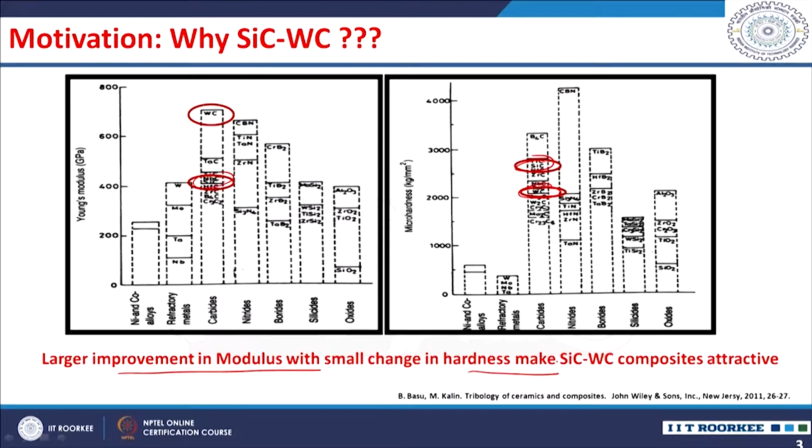Among the silicon carbide based ceramic composites, we can see the Young's modulus of tungsten carbide is much higher than silicon carbide, whereas the hardness is slightly lesser than the silicon carbide hardness. So, in a silicon carbide tungsten carbide composite, we can expect an improvement in the modulus with a small change in the hardness. Such a composite will be attractive for several tribological applications.

However, our literature study indicates that such a material has not been studied for its tribological behavior. Particularly, silicon carbide has higher hardness and oxidation resistance, whereas tungsten carbide has better strength and fracture toughness. So, the composite of silicon carbide tungsten carbide is expected to exhibit improved properties in wear conditions.

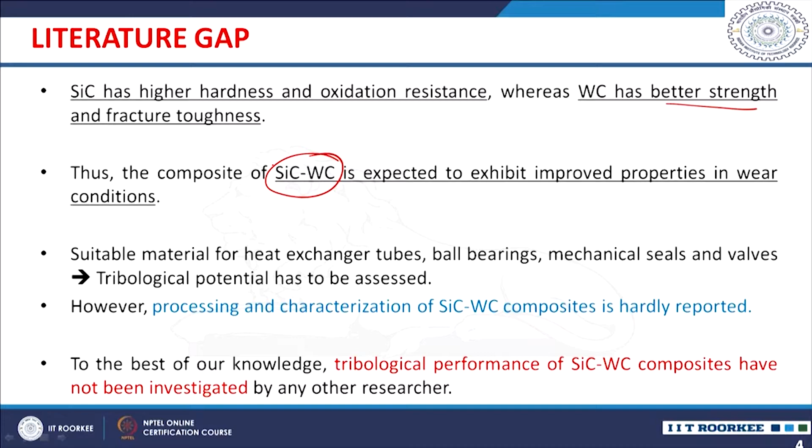However, the processing and characterization of dense composites of silicon carbide tungsten carbide is a difficult task. So, very few studies are reported for silicon carbide tungsten carbide composites. Particularly, preparation of dense silicon carbide tungsten carbide composites is not yet reported. In addition, the tribological performance of dense silicon carbide tungsten carbide composites has not been investigated by any other researchers.

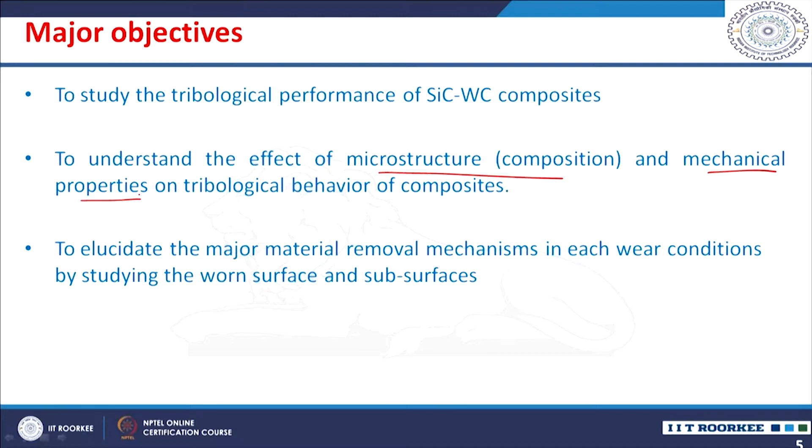So, in this context, the major objectives of the present study, which will be discussed in today's class, are to study the tribological performance of the silicon carbide tungsten carbide composites, and to understand the effect of microstructure, by changing the composition, as well as mechanical properties on the tribological behavior of these composites, particularly to elucidate the major wear mechanisms in each wear condition by studying the worn surfaces and subsurfaces.

These silicon carbide tungsten carbide composites were prepared at the University of Seoul with the support of Professor Youngwook Kim of University of Seoul. Four composites are selected for the present study with varying tungsten carbide content from 0 to 50%. So, 0, 10, 30, 50 weight% tungsten carbide containing silicon carbide ceramic composites are prepared with beta silicon carbide with a small amount of alpha silicon carbide and aluminum oxide, yttrium oxide, calcium oxide as additive systems.

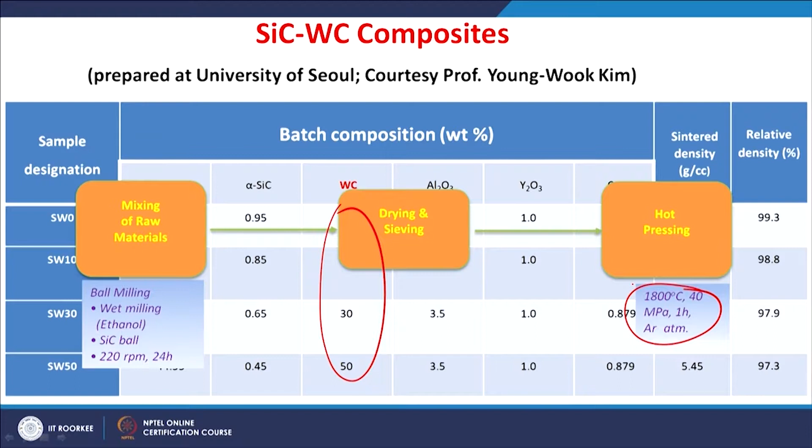These were prepared by hot pressing. Before hot pressing, the batch powders were mixed, then dried and sieved, followed by hot pressing at 1800 Celsius and 40 MPa for 1 hour in argon atmosphere. The sintered density of these materials is 98 to 99%.

The microstructure of these sintered silicon carbide composites exhibits almost equiaxed grains of silicon carbide, with very little presence of any elongated grains. The almost equiaxed SiC grain size decreases from around 830 to 550 nanometers with increase in the tungsten carbide content from 0 to 50%.

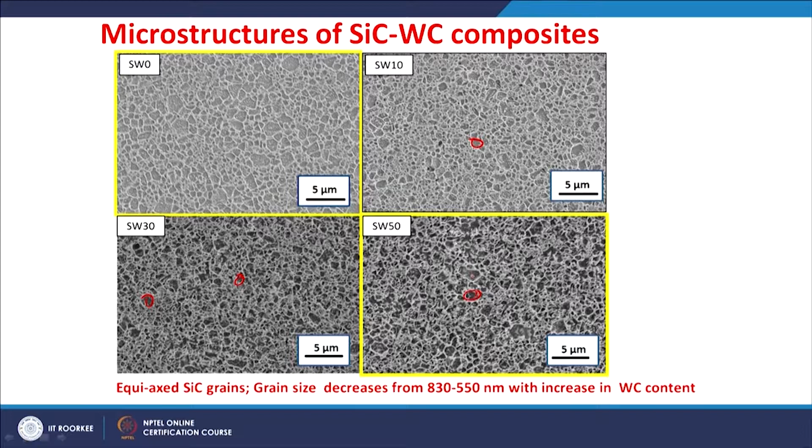Now, with respect to the tungsten carbide content, we can see uniformly distributed tungsten carbide particles in the silicon carbide matrix, whereas you can also see certain agglomeration when you have a larger amount of tungsten carbide. This SiC with 50% tungsten carbide composite shows agglomerations of tungsten carbide particles. The mechanical properties were studied for these composites. The hardness increases up to 30% tungsten carbide, whereas it slightly decreased with the 50% one, whereas fracture toughness improves from 5.85 MPa root meter to around 6.66 MPa root meter.

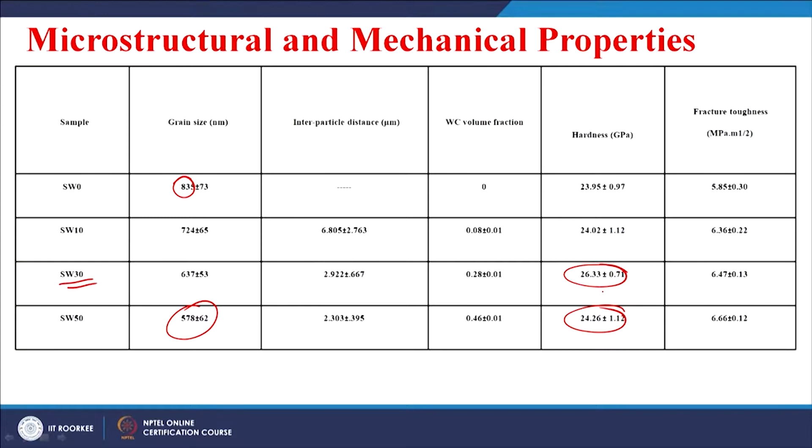If you look at the correlation between the microstructural characteristics and the mechanical properties, the grain size decreased from 835 nanometers to 578 nanometers with increase in tungsten carbide content. The interparticle distance also decreased with a larger amount of tungsten carbide in these composites. So, it indicates that while sintering, the grain growth was restricted by the presence of a larger amount of tungsten carbide content. It actually reflected in the properties, particularly hardness showed an increase for the silicon carbide 30% tungsten carbide composite, and the fracture toughness continuously increased from 5.85 to 6.66 MPa root meter. This fracture toughness improvement is very important for any structural applications. So, it is to be studied.

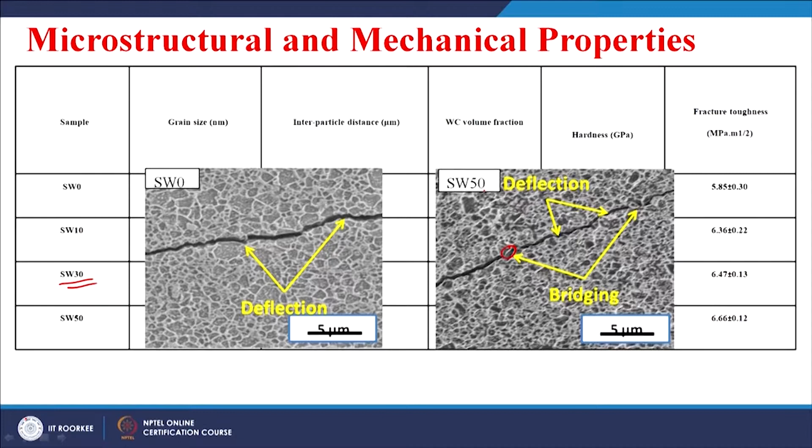So, after Vickers indentation, at the edges of these indents the cracks are propagated, and we can see here when no tungsten carbide was added, the deflections for the cracks are minimal, whereas the deflection or the bridging are actually improved when you have the tungsten carbide particles. So, these tungsten carbide particles improve the fracture toughness by the bridging of the crack or the deflection of these cracks. So, with this introduction of this material,

the tribological performance is systematically studied in two different sliding wear conditions. For this, one unidirectional sliding wear study was done and another reciprocatory sliding study was done. So, in the unidirectional sliding wear study, the counter body influence and the tungsten carbide content were particularly studied, whereas in the reciprocatory sliding conditions the temperature of the sliding test and the tungsten carbide content were particularly studied. In addition to the sliding wear behavior in unidirectional, a major focus is given to the subsurface analysis to find out the origin of the material removal mechanisms.

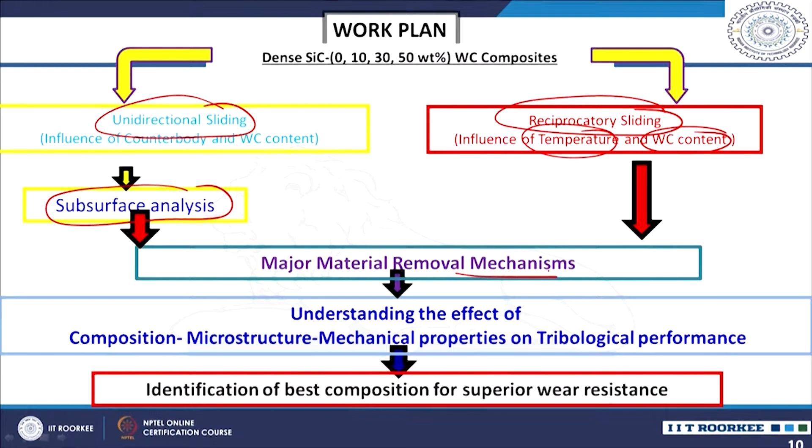Basically, the major aim of this particular study is to elucidate the major material removal mechanisms, so that we can have an understanding of the very important relation of the composition of this composite, that is tungsten carbide content variation, that reflects into microstructure, and the microstructural influence on the mechanical properties and the tribological performance. So, the particular study is to understand the effect of the composition or microstructure on the mechanical and tribological behavior, and to identify the best composition for the superior wear resistance. So, let us go through the salient results obtained in unidirectional sliding wear studies.

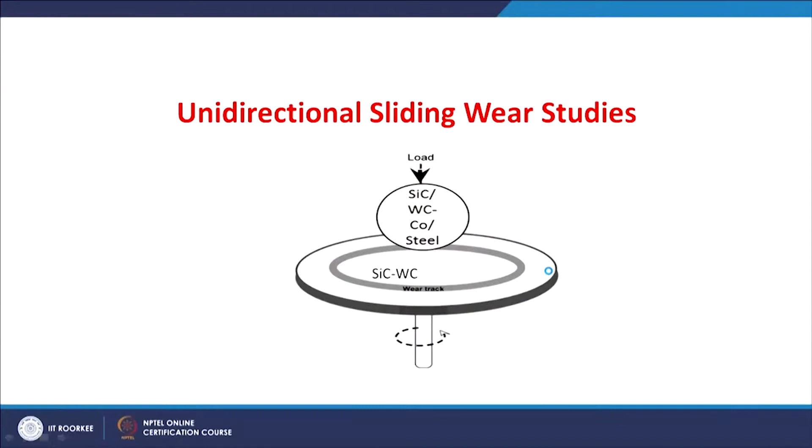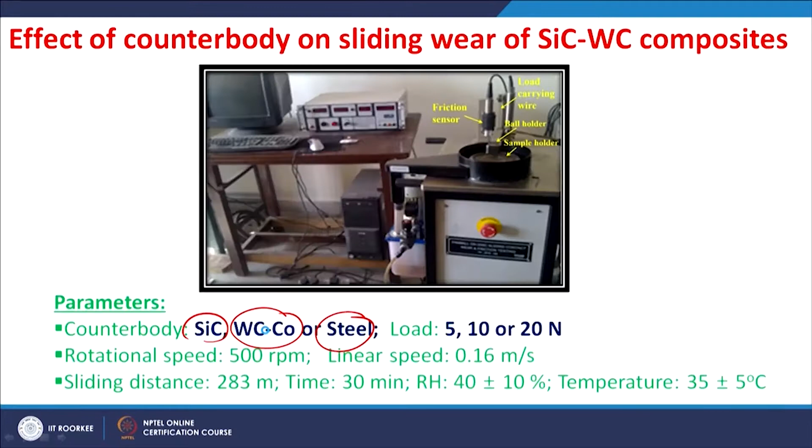So, mainly three different counter bodies were used: silicon carbide ceramic, tungsten carbide cobalt, which is called a cermet, and a steel. Three loads, separately 5, 10, and 20 Newton, were applied, with a combination of other parameters which were kept constant. For this, the ball on disc tribometer was used. So, the disc is the specimen, which is the silicon carbide tungsten carbide composite, whereas the ball is changed from silicon carbide to tungsten carbide cobalt or to steel, and the friction was measured and the wear was determined.

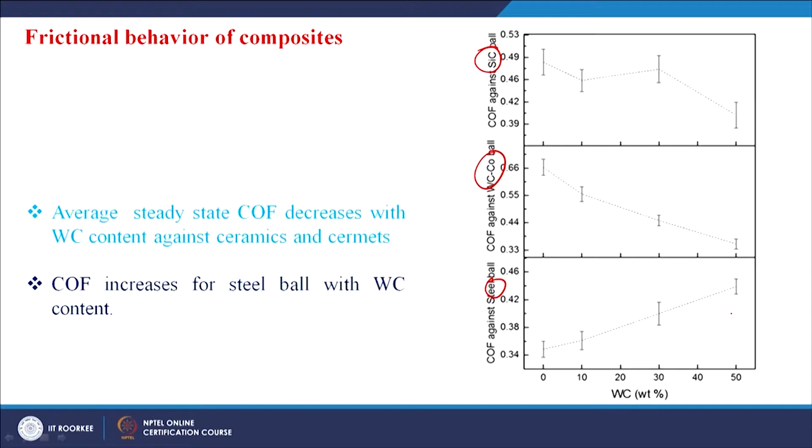So, the friction coefficient shows that the average coefficient of friction actually decreases against silicon carbide or tungsten carbide cobalt ball, whereas against steel it actually increases because the surface is actually changed at the contact. So, there is a friction behavioral change. Let us understand it further. When the wear volume was measured, as I explained in the previous class, the profilometry was used to read the surface profiles in a 2-dimensional way, and over a particular slide distance this was integrated and the wear volume was determined.

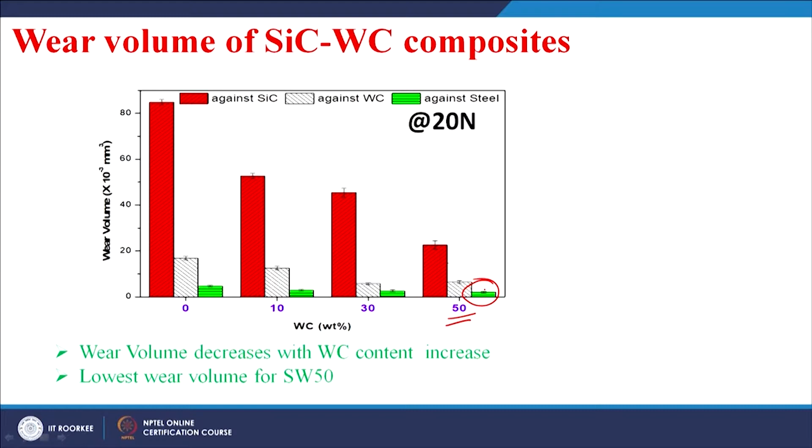So, you can see the wear volume of these composites having 0, 10, 30, 50% tungsten carbide content, against silicon carbide, against tungsten carbide cobalt, and then against steel. So, the wear volume decreased with tungsten carbide content for any composite against any counter body, whereas the lowest wear was observed with the silicon carbide containing 50% tungsten carbide. So, at a particular load the wear volume decreased with tungsten carbide increase, and the lowest wear was obtained with the SW50 composite. Regarding the effect of the counter body, the wear volume was highest for the composites worn against the silicon carbide ball, whereas the wear volume was the lowest for the composites worn against the steel ball. So, tungsten carbide cobalt data is in between.

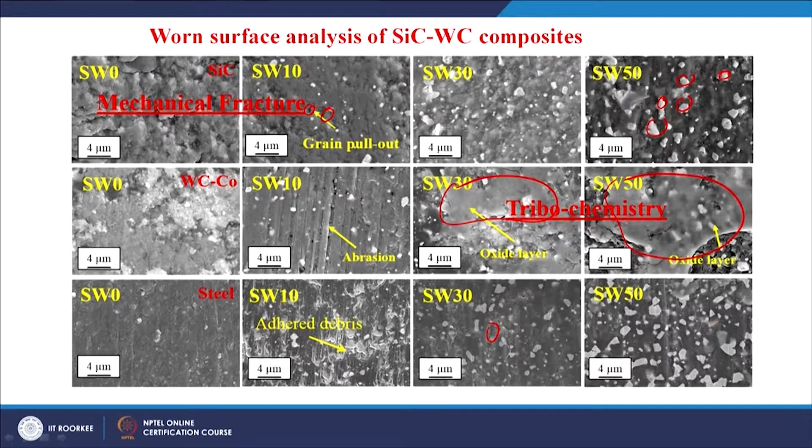But as the tungsten carbide content is increased, you can see the presence of a particular layer. This layer predominantly covers the surface, particularly when you have the highest tungsten carbide content. But when you see the composite worn surfaces which were worn against steel, again they show the debris and then fracture and the removal of these tungsten carbide particles. So, there is a change from the mechanical fracture to tribochemistry when there is a change in the tungsten carbide content or there is a change in the counter body.

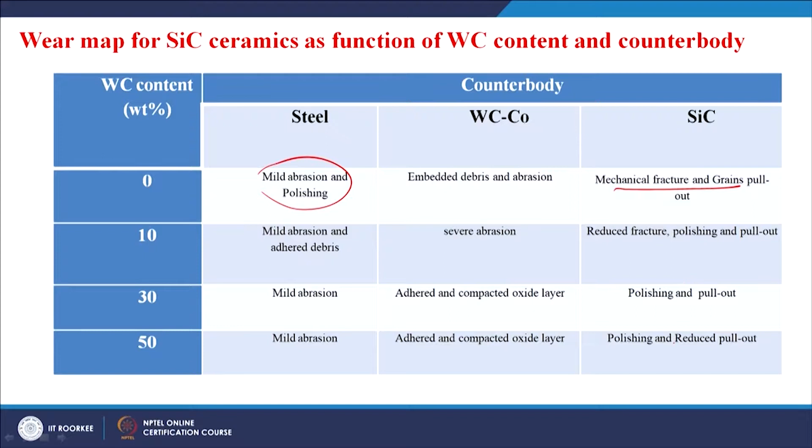Against silicon carbide, again there is only grain pull out and fracture, only change in the fracture is observed with increase in the tungsten carbide. So, with an increase in the tungsten carbide content, the fracture is reduced and it becomes more polished and reduced pull out. To understand the actual mechanisms, we need to also study the counter body

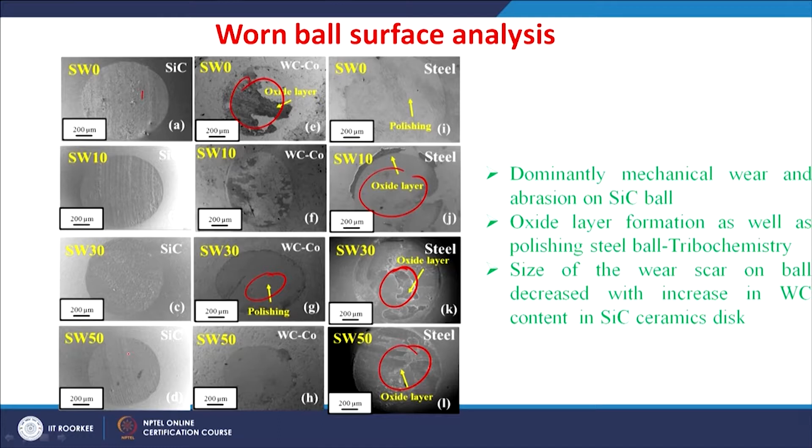worn surfaces. So, you can see the counter body which is a steel. So, the impression is a circular impression after the wear. The size of the wear scar on the ball decreases with the increase in the tungsten carbide content in the silicon carbide ceramic disc. So, dominantly there is a mechanical wear and abrasion on the silicon carbide ball, whereas oxide layer formation as well as the polishing is observed against tungsten carbide or on the balls of tungsten carbide or the steel. So, the ball surface analysis shows the presence of tribochemistry on the tungsten carbide cobalt balls or the steel balls, whereas the silicon carbide balls, they do not show any tribochemistry. It is simply the fracture, or you can see the abrasion and then removal of this material by fracture.

So, in order to understand the chemistry difference on the surface against different counter bodies, the Raman analysis was done, and the Raman analysis shows different products formed as a debris. So, the debris against the silicon carbide, you can see the oxides of silicon and tungsten oxide. So, generally when the harder counter body is sliding over the disc surface because of the harder indenting points, the material is removed and then the material is subjected to oxidation in normal ambient conditions of sliding. So, you can see certain oxides also forming against tungsten carbide cobalt.

Also you can see the tungsten oxide, silicon oxide and the cobalt tungsten oxide debris. And against steel, in addition to these oxides, we also see certain oxides of iron and iron tungsten oxide. So, it actually indicates there is a chemistry difference in the debris formed when these composites were subjected to sliding against different counter bodies. The friction is more when these were worn against steel because of the presence of the harder oxides of iron or iron tungsten oxide, and these iron tungsten oxides are not present in the other conditions. So, you do not have such an increase in the friction.

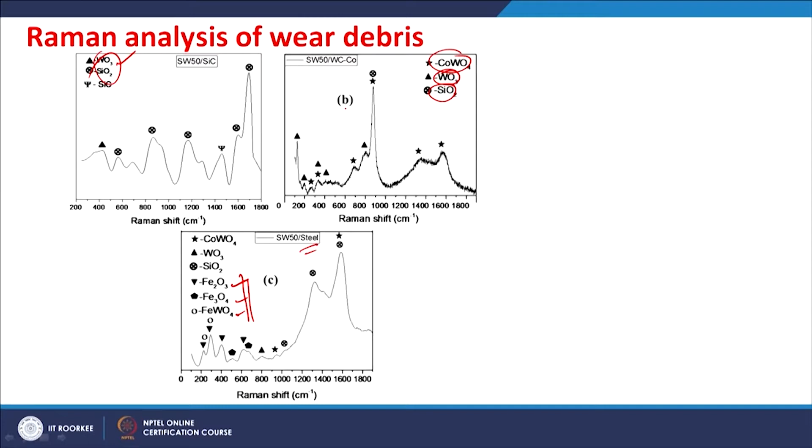So, summarizing the silicon carbide ceramics when you do not have any tungsten carbide, they just fracture by intergranular fracture, intergranular mode. So, this is actually the same against silicon carbide or tungsten carbide cobalt or steel ball. So, the larger grains came out as a debris, and when the silicon carbide contains some tungsten carbide particles, the composite shows a decrease in the size of the grain. So, the debris also will be smaller in size. So, the fracture we observed also changed predominantly from intergranular to transgranular when you have the tungsten carbide particles in a silicon carbide ceramic.

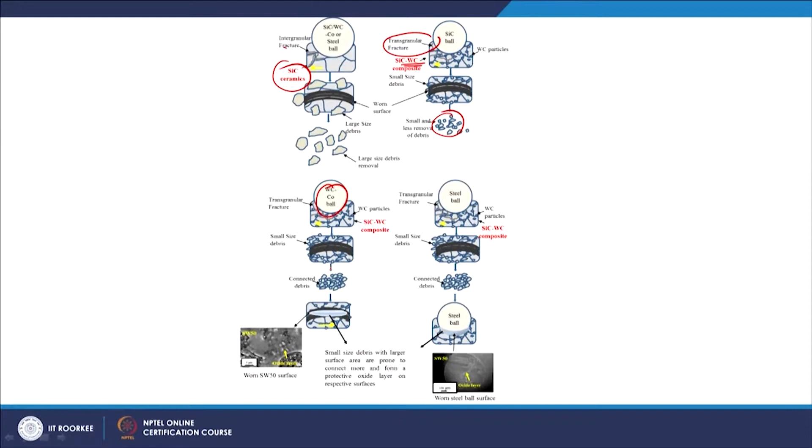Now, if you see the effect of the counter body against tungsten carbide cobalt ball, these composites again fractured by the transgranular mode, but because of the finer size of the debris and also with the increase in tungsten carbide content in the composite, particularly this SW50 or SW30, you can see these smaller debris with a larger surface area are more prone to connect and then form a protective oxide layer like this. So, you get a decrease in the wear. In case of the steel ball, these composites again fractured by the transgranular mode, and the smaller sized debris connect to each other and form a layer, and the layer is actually observed on the ball surface.

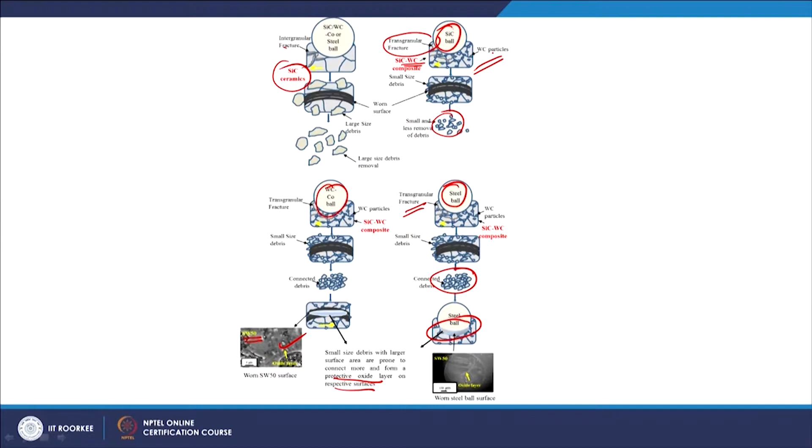So, the layer is observed either on the ball surface of the steel or on the disc which was worn against the tungsten carbide cobalt. They show certain layers, whereas such a layer is not observed when these composites were worn against silicon carbide. Against silicon carbide, it is purely the fracture. The material is removed only by the mechanical fracture and then the resultant grain pull out.

So, the major results from the unidirectional sliding wear study are like this. The coefficient of friction depends on the counterpart materials irrespective of their ball hardness. With increase in tungsten carbide content in silicon carbide ceramics, the coefficient of friction against steel ball increases, whereas it decreased for other silicon carbide or tungsten carbide cobalt ball. Wear volume decreased with increase in tungsten carbide content, and the silicon carbide 50% tungsten carbide composite exhibited minimum wear

against any counterbody. Regarding the major mechanism of material removal, against silicon carbide ball, the silicon carbide tungsten carbide composites are worn by purely mechanical fracture with micro cracking, whereas tribochemical wear is dominating for the composites worn against tungsten carbide cobalt or the steel ball. So, there is a difference in the mechanism of material removal. So, there is a difference in the friction and the wear. So, this actually indicated very important information that when the silicon carbide tungsten carbide composites were subjected to different counterbodies, we have a different wear mechanism dominating. So, that results into the performance difference.

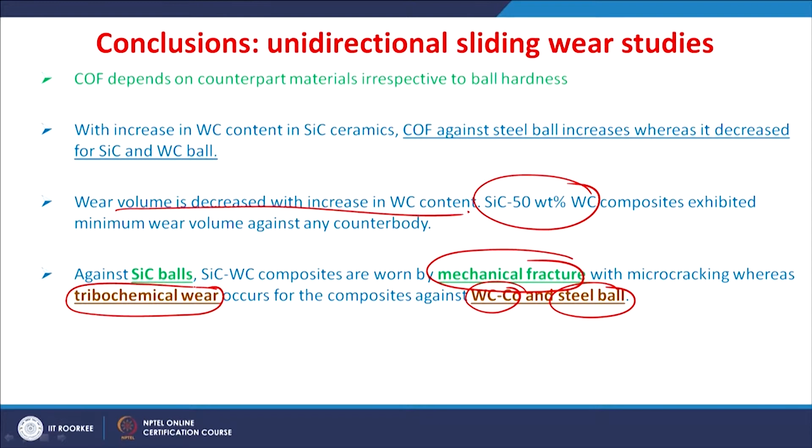Amongst the three counterbodies, when we use the silicon carbide counterbody, purely mechanical fracture is dominating. So, it is very important to understand the origin of such a mechanical fracture. So, we selected these silicon carbide tungsten carbide composites worn against silicon carbide ball only, where there is a purely, dominantly mechanical fracture, for further studies of the subsurface analysis. The subsurface analysis study is very important to identify the origin of such a fracture. So, we purposefully have not taken these silicon carbide tungsten carbide composites sliding wear studies against the tungsten carbide and steel ball, where there was a tribochemistry.

So, these subsurface analysis studies were possible with the support from Professor Amartya Mukhopadhyay of IIT Bombay. So, we can see here the subsurface analysis was done by using a combination of a focused ion beam with TEM analysis. Sample was cut at an angle of 35 degree using a focused ion beam to observe the subsurface.

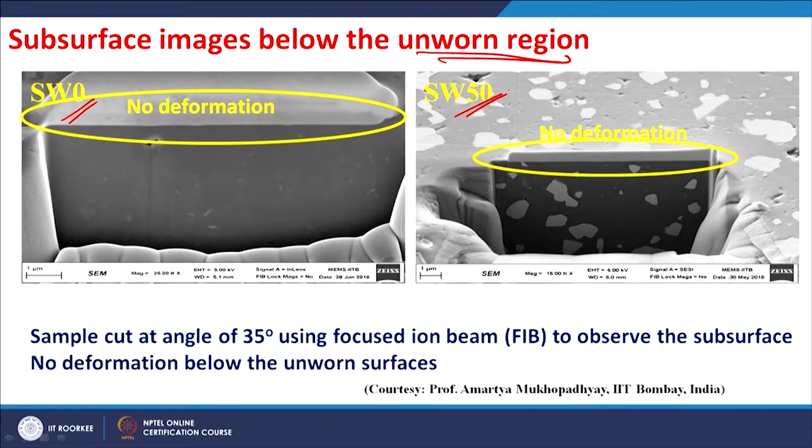So, the unworn regions of the sample do not show any deformation, whether it is a silicon carbide without having any tungsten carbide or with having any tungsten carbide. There is no signature for any deformation, whereas when these composites were worn, you can see a lot of difference in the subsurface regions. So, when it is only silicon carbide, you can see this damaged zone is around 1 micrometer. In case of composite, there is only 300 nanometers. So, there is a resistance against the damage at the subsurface when you go for the composite.

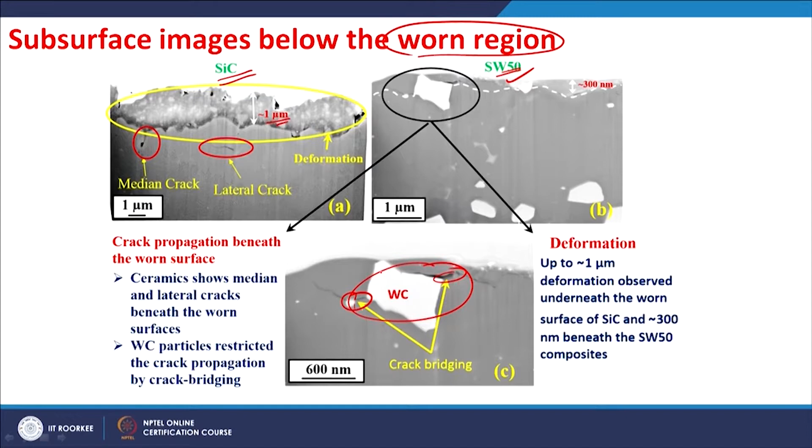In addition to that, we can also see several cracking signatures here. So, generally these ceramics show median and lateral cracks beneath the worn surfaces. It actually follows again the classical linear fracture mechanics, when the hard and sharper contact slides over a surface, particularly the brittle surface, the median or lateral cracks are generally found. But if you can see this difference between the subsurface images of these silicon carbide ceramic and silicon carbide tungsten carbide composite, the tungsten carbide particles restricted the crack propagation by the crack bridging, right. So, this essentially shows there is a benefit when you go for a composite from restricting the crack propagation.

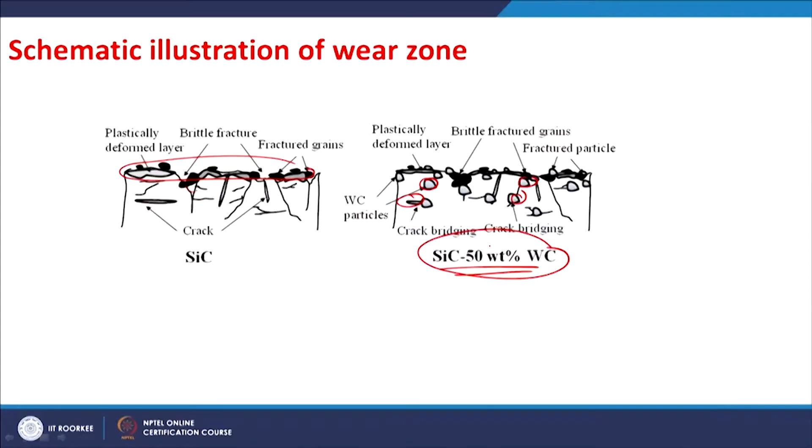So, this can be illustrated schematically. The upper region generally has a plastically deformed region, and just below that you have a fracture region. So, the fracture region is characterized by this cracking, whether it is median or the lateral cracking. When you have tungsten carbide particles, these particles result in crack bridging or the crack deflection that improves the resistance against the fracture. So, you get a lesser wear also. So, if you can recall, these silicon carbide tungsten carbide composites showed better wear resistance than the silicon carbide ceramic because of this resistance against the crack propagation.

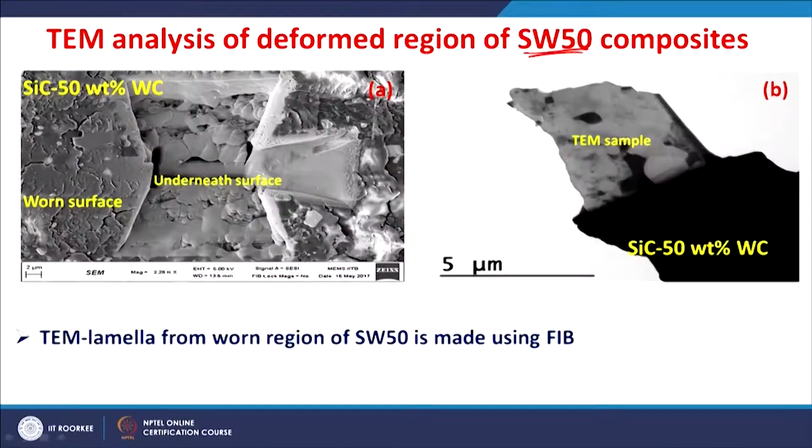To understand the origin of such behavior, the TEM analysis was done on the deformed region of the selected composite. A TEM lamella was made from the worn region using the FIB. So, this TEM sample was subjected to further investigation. So, this shows the silicon carbide grains and then tungsten carbide particles.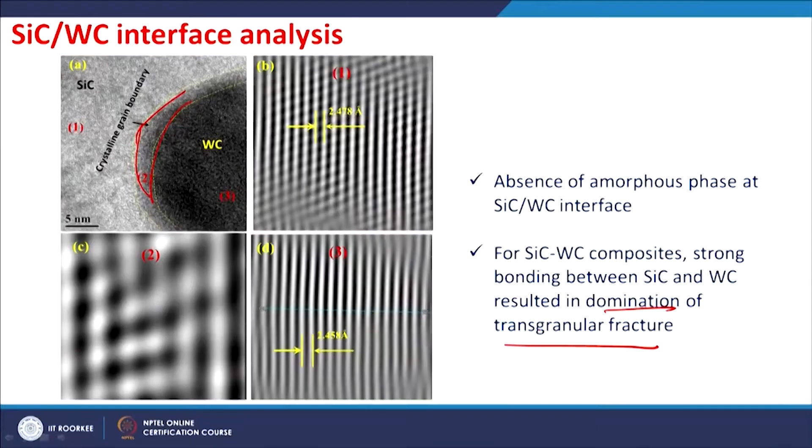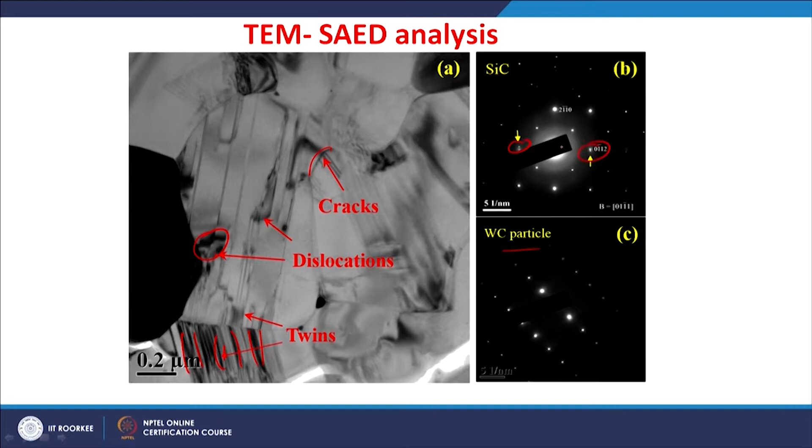Further, the selected area diffraction analysis also indicates the crystalline arrangement of the silicon carbide or these tungsten carbide particles. In addition to that, the regions underneath the worn surfaces show the signatures of cracks as well as dislocations. In addition to these dislocations and cracks, we can also see a lot of twins. The SAED pattern also indicates the presence of the twins. So, the deformation is possible just below the worn region in terms of the dislocations as well as the twins.

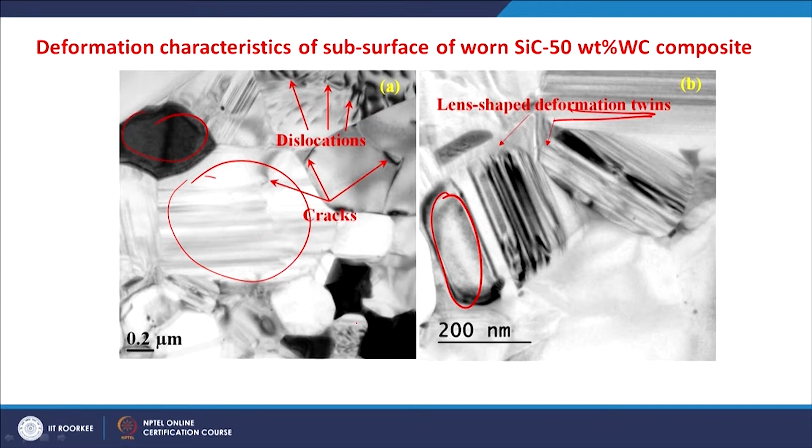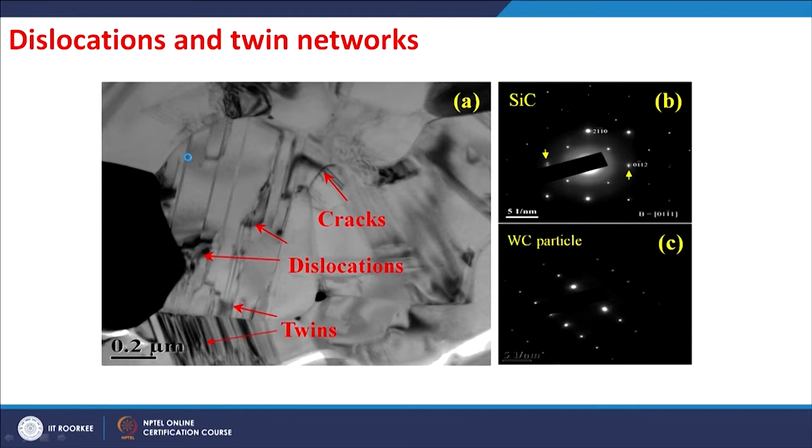As we know, silicon carbide ceramics have very few slip systems. It is quite possible the deformation happens by the formation of these twins. The shape of these twins indicates the lens, which indicate the deformation induced twins. So, you can see on the grains of the silicon carbide, the cracks and the dislocations are present, whereas the dislocations are not present in the tungsten carbide or at the interface of the tungsten carbide and silicon carbide.

So, concluding the subsurface study results, the deformation zones underneath the worn surface are larger for monolithic silicon carbide as compared to the silicon carbide tungsten carbide composite. It is more or less 3 times larger for the silicon carbide ceramics as compared to the silicon carbide 50% tungsten carbide composite. Micro cracks are observed below the worn region till 2 micrometer depth for monolithic silicon carbide ceramics. By contrast, the tungsten carbide grains are observed to bridge the cracks in case of the silicon carbide tungsten carbide composite.

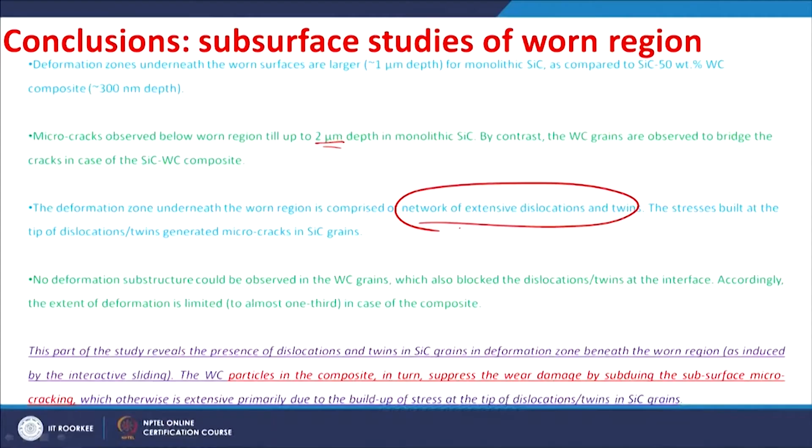The deformation zone underneath the worn region comprises a network of extensive dislocations and twins. So, the stresses built up at the tips of these dislocations or twins generate the micro cracks. So, you see a lot of micro cracks in silicon carbide grains, whereas no deformation substructure is observed in the tungsten carbide grains, which also blocked the dislocations or twins at the interface. Therefore, the extent of deformation is limited to almost 1/3 of what we observed here in case of the composite.

So, this particular study is very important in the sense that for preparation of such a sample for TEM analysis, the sample must be taken from the region underneath the worn surface. So, for that FIB was used and then TEM analysis was done carefully, which revealed this information about the deformation zones, the cracking as well as the beneficial effect of the tungsten carbide particles in the silicon carbide ceramics.

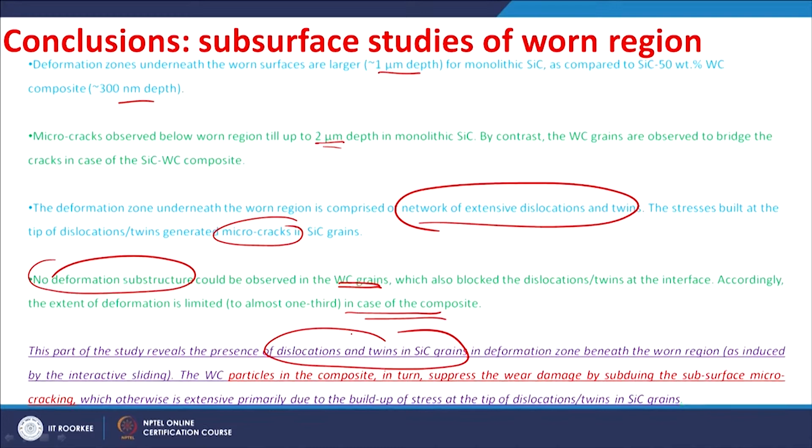So, this particular study reveals the presence of dislocations or twins in the silicon carbide grains in the deformation zone beneath the worn region. The tungsten carbide particles in the composite in turn suppress the wear damage by subduing the subsurface micro cracking, which otherwise is found to be very extensive, mainly because of the build up of stresses at the tips of these dislocations or twins in the silicon carbide grains. So, these stresses were developed because of the interactive sliding. So, the sliding induced stresses are responsible for the cracking. The cracking can be minimized when you use the tungsten carbide particles. That means a composite approach is very much beneficial in suppressing the wear damage by subduing the subsurface micro cracking.

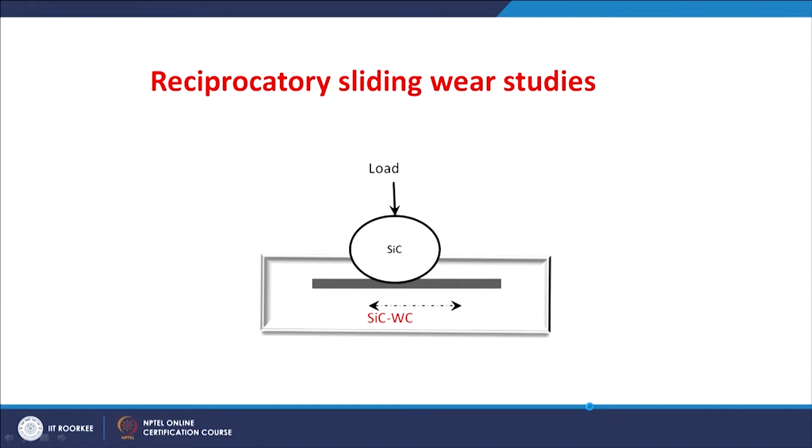Let us go to the last part of this lecture, the reciprocatory sliding wear studies. In order to understand the effect of the sliding mode from unidirectional to reciprocatory, we used a reciprocatory sliding wear test apparatus, where the ball was silicon carbide only and the load we changed from 6 to 19 Newton. These loads were selected to maintain similar levels of Hertzian stresses which were used in the unidirectional sliding test.

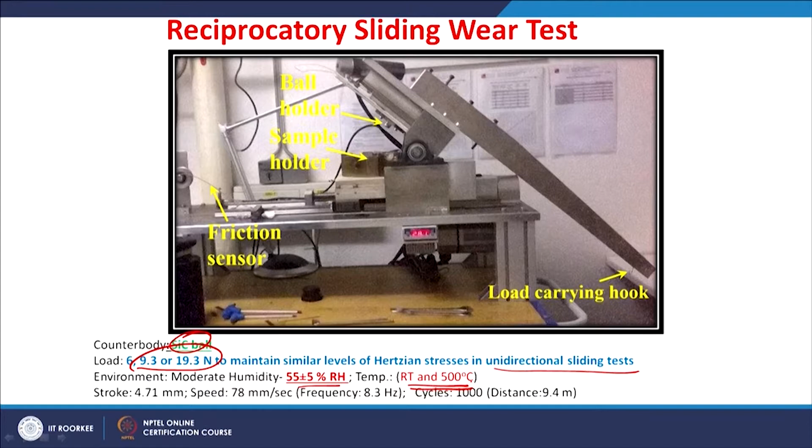So, these were done in moderately humid conditions at two different temperatures, room temperature and 500 Celsius. So, the major aim of this study is to understand the effect of the tungsten carbide content as well as the temperature of testing on the reciprocatory sliding wear behavior of the silicon carbide tungsten carbide composites.

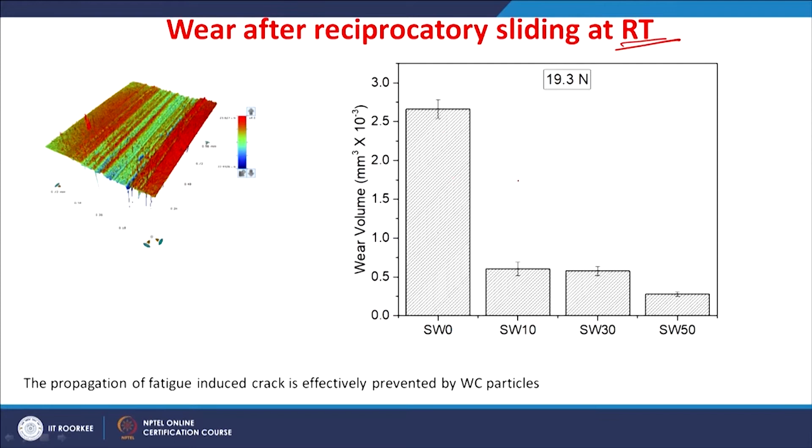Now, you see the wear volume of the composites worn at room temperature. As the tungsten carbide is introduced in the silicon carbide ceramics, the wear was substantially decreased. That means the reciprocatory sliding, which induces the fatigue-induced cracks, is effectively prevented by the tungsten carbide particles. This study was selected to understand the behavior of these composites in reciprocatory sliding.

In reciprocatory sliding, we have a difference in the contact time of this debris. So, it will actually affect the properties or the performance. If you can see the silicon carbide tungsten carbide composites after sliding in a reciprocatory mode at room temperature, the surfaces were showing micro cracks and pull out of the tungsten carbide particles, but with an increase in the tungsten carbide content, the fracture was minimally reduced.

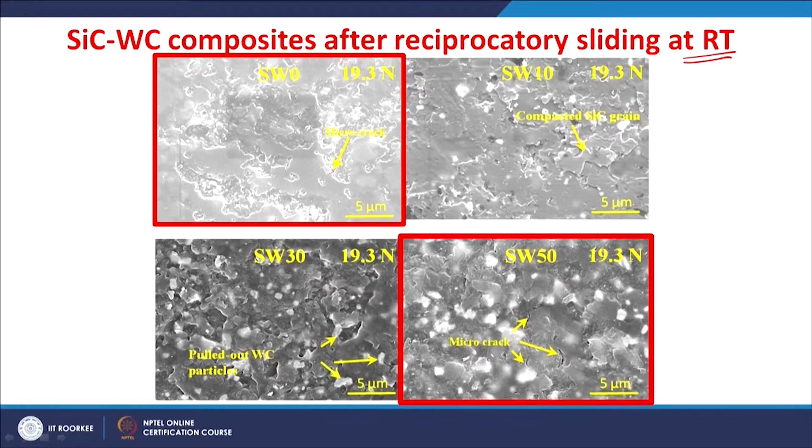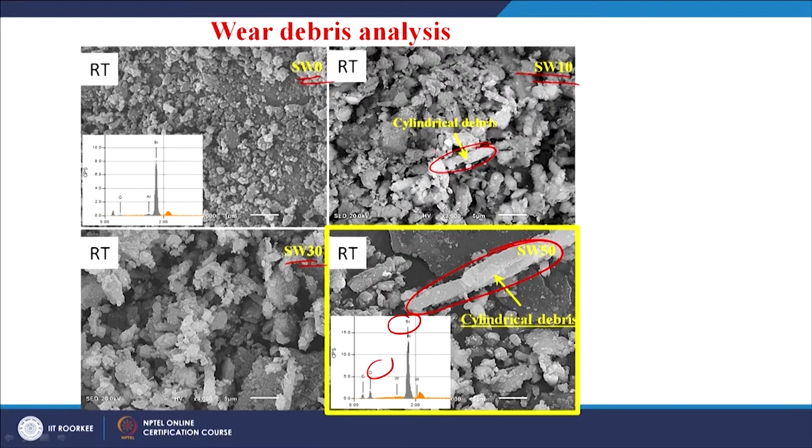The debris analysis particularly shows the presence of a cylindrical shaped debris. The EDX analysis shows these are oxides of silicon. You can see that as the tungsten carbide content increased, you get more and more finer debris, as well as the presence of the cylindrical shaped debris. So, this information is very important to analyze the unidirectional and reciprocatory sliding wear test results.

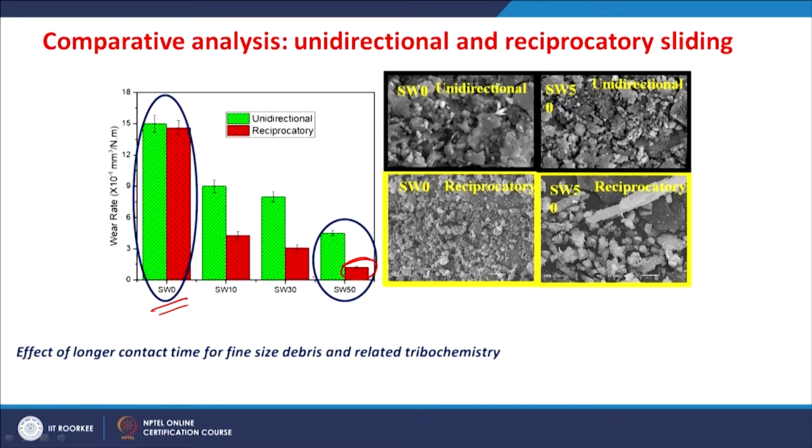You can see in the case of silicon carbide ceramics without tungsten carbide, the wear rate was more or less the same whether it is unidirectional or reciprocatory. As the tungsten carbide content is increased, you get a reduction in the wear rate in the reciprocatory sliding wear test. That indicates the effect of the longer contact time for the finer debris particles. These finer size debris will connect to each other and tend to form a cylindrical debris. Those cylindrical debris generally facilitate easy sliding.

The cylindrical debris generally forms only when there is a viscous surface. This viscous surface layer is because of the interaction with the silicon oxide present on the silicon carbide particles or formed due to the wear test. This silicon oxide reacts with the moisture and forms a silicon oxyhydride. The silicon oxyhydride particles connect to each other and form a cylindrical debris. So, the viscous surface is removed from the composite and the debris are connected to each other and form a cylindrical shape.

So, there is a tribochemistry when the sliding test mode was changed from unidirectional to reciprocatory. In the unidirectional it is a mechanical fracture only, whereas in reciprocatory there is a signature of the tribochemistry involved. If you look at the wear results obtained for these composites tested in unidirectional and reciprocatory sliding conditions, the effect of the longer contact time for the finer size debris leads to this tribochemistry and the resultant wear. So, you get a decrease in the wear.

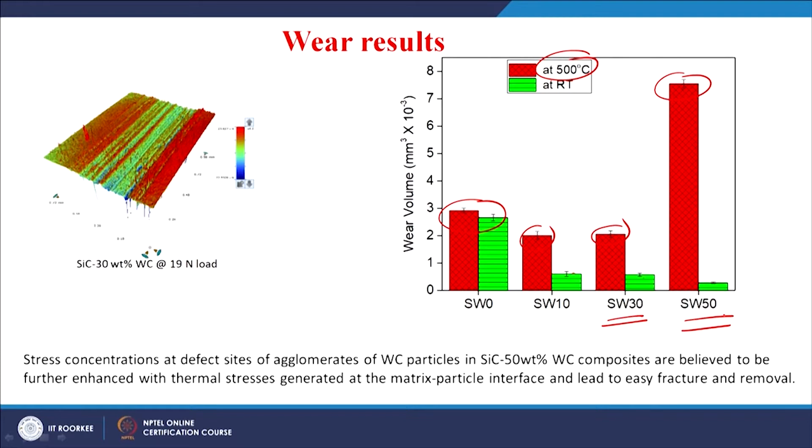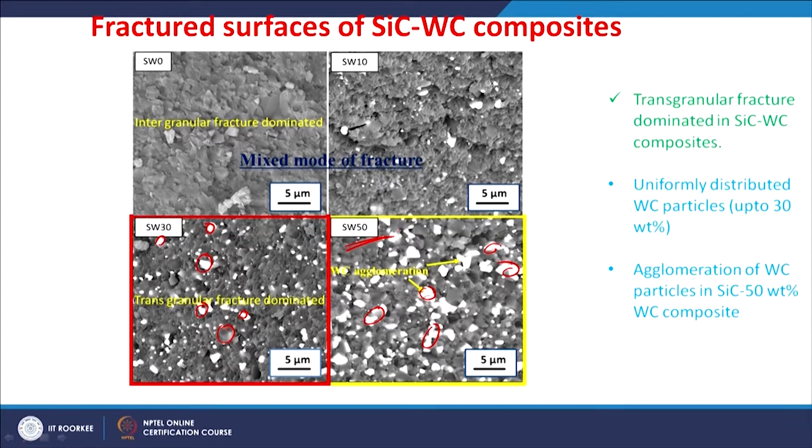But if you look at the SW30 and SW50, the stress concentrations at the defect sites of agglomerates of tungsten carbide particles, which we saw in the previous slide, are dominantly present in the composite with a larger amount of tungsten carbide content. These agglomerates result in increased stress concentrations. The stress concentrations at the defect sites of these agglomerates, particularly in the SW50 composite, are believed to be further enhanced with thermal stresses generated at the interface of the matrix and particle. That leads to easy removal of the material. So, you get a much larger wear volume when the tungsten carbide was around 50%.

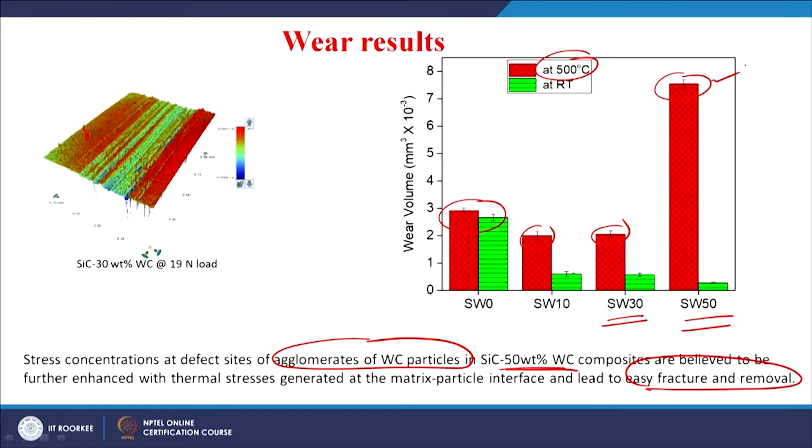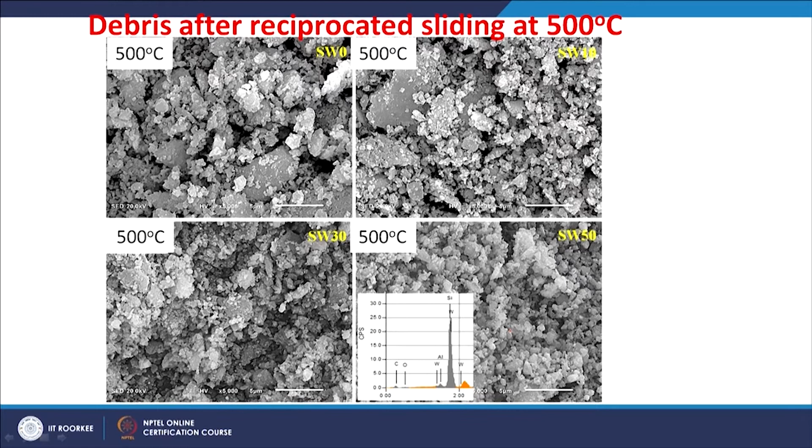Looking at the silicon carbide tungsten carbide composite surfaces after reciprocatory sliding at room temperature and at the high temperature of 500 Celsius, you can see there is a difference in the mechanism. The fracture is increased when the testing was done at higher temperatures. At room temperature, as the tungsten carbide content is increased, we can see certain tribochemical layer formations and removal, whereas such tribochemical layer formations are not found in those composites worn at high temperatures. The debris also shows no presence of any cylindrical shaped debris. These are all fractured grains with no signatures of any tribochemistry.

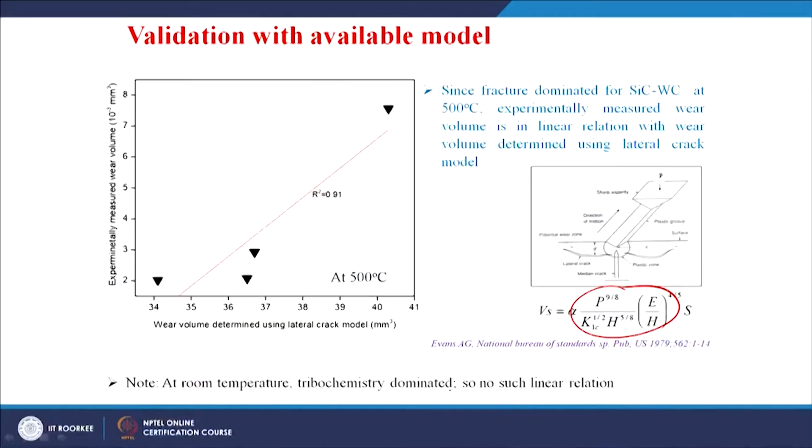We also validated the experimentally measured wear volume with the wear volume determined using a lateral crack model. Since fracture dominated for the silicon carbide tungsten carbide at higher temperatures, the experimentally measured wear volume is in linear relation with the wear volume determined using the lateral crack model. But at room temperature, because tribochemistry dominated, no such linear relation is observed. So, this also indicates mechanical fracture at higher temperatures, whereas tribochemical wear at lower temperatures, room temperature.

Concluding these results from the reciprocated sliding wear studies, increased tungsten carbide content resulted in a reduction in the friction and wear in ambient reciprocated sliding conditions, with the generation of cylindrical debris.

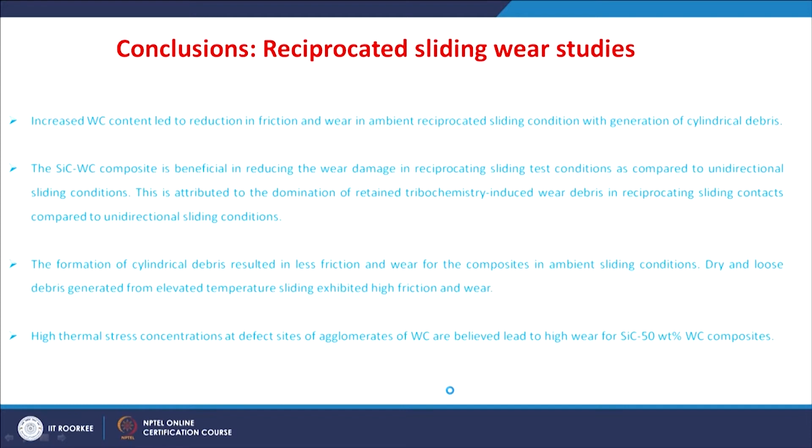So, cylindrical debris formation is observed only in the ambient conditions. The silicon carbide tungsten carbide composite is beneficial in reducing the wear damage in reciprocated sliding test conditions as compared to the unidirectional sliding test conditions. This particular observation is attributed to the domination of retained tribochemistry induced wear debris. Because of the longer time for the debris in a contact, the tribochemistry induced wear is much retained. So, in the reciprocated sliding conditions, it is much beneficial.

The formation of this cylindrical debris resulted in lesser friction and wear for the composites in the ambient sliding conditions, whereas dry and loose debris generated from the elevated temperature sliding conditions resulted in high friction and wear. So, high thermal stress concentration at the defect sites of the agglomerates of tungsten carbide particles is believed to lead to higher wear when there is a larger amount of tungsten carbide content.

So, this particular study indicates the influence of the sliding mode, the influence of the tungsten carbide content in the silicon carbide tungsten carbide composite, and the influence of the temperature. When the sliding mode was changed, the reciprocated sliding actually gave more tribochemistry induced wear, and the cylindrical debris are obtained in the ambient reciprocatory sliding condition, and that resulted in less friction and wear, whereas dominantly mechanical fracture is observed in those reciprocatory sliding wear tests done at elevated temperature. So, higher friction and wear was observed.

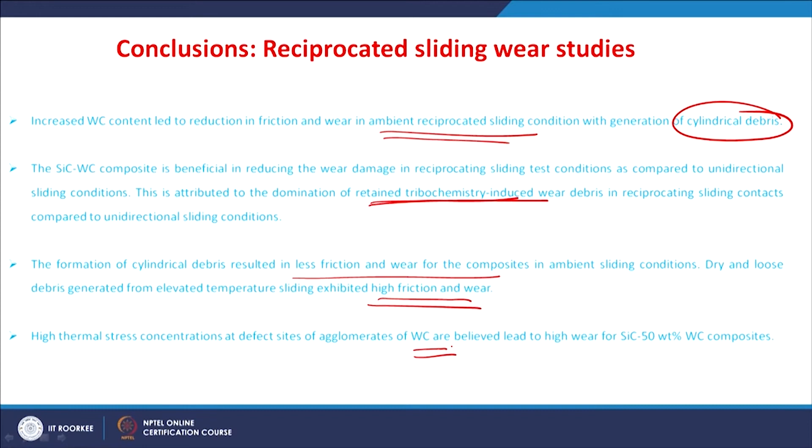With respect to tungsten carbide content, always the silicon carbide tungsten carbide composite is beneficial in reducing the wear damage in reciprocatory sliding conditions, as the fatigue induced crack is deflected or bridged. So, the removal of the material by fracture is reduced. So, you got a benefit in the silicon carbide tungsten carbide composite.

So, finally summarizing, we have gone through the salient results obtained in the tribological study at different length scales for the silicon carbide tungsten carbide composites. So, we found wear was decreased when tungsten carbide content is increased in unidirectional sliding conditions as well as the reciprocatory sliding conditions, whereas mechanical fracture is found against silicon carbide ceramic ball in unidirectional sliding conditions. Tribochemical wear dominates against tungsten carbide, cobalt or the steel ball.

So, in case of reciprocatory sliding conditions, which were done in silicon carbide against silicon carbide ball only, they again showed an enhanced tribochemistry. So, you can see the mechanical fracture against silicon carbide in unidirectional conditions actually changed to a tribochemical induced wear at room temperature for these composites, whereas at higher temperatures again the mechanical fracture is dominant.

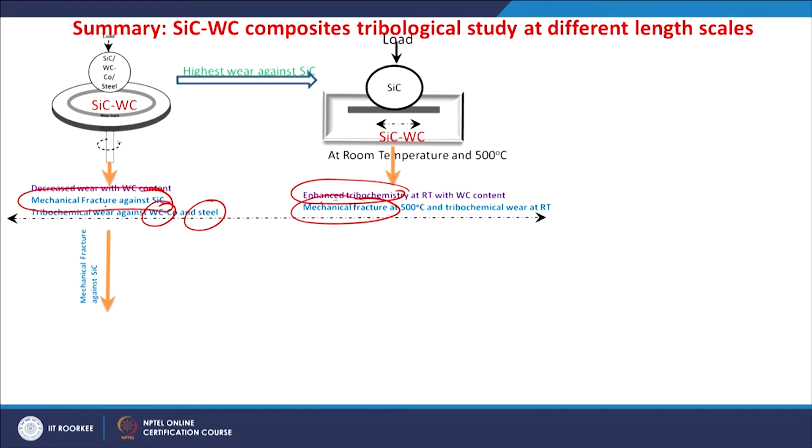So, in order to understand the origin of material removal, we selected the silicon carbide tungsten carbide composites for the study in subsurface regions. We selected the composites worn against the silicon carbide only. The reason, again, is that it is only the mechanical fracture, there is no tribochemical layer. So, it is easy to understand the origin of the material removal from the beneath region. So, subsurface regions,

subsurface study indicates the plastically deformed region as well as the cracked region, and presence of the tungsten carbide always is beneficial in reducing the wear by crack bridging and crack deflection, so that the fracture is reduced, the wear is reduced. So, beneath the worn region, the silicon carbide tungsten carbide composite shows lesser or reduced propagation of the cracks because of the tungsten carbide particles present.

Further analysis by TEM shows the origin of the wear occurs by the cracking. The cracking is possible by the stresses induced by the sliding at the tips of those deformation signatures like dislocations or the twins. So, these cracks will propagate further and lead to material removal. When a tungsten carbide particle is present at the interface, all these cracks are actually stopped, and the deformation signatures are not present at the interface or inside the tungsten carbide particles.

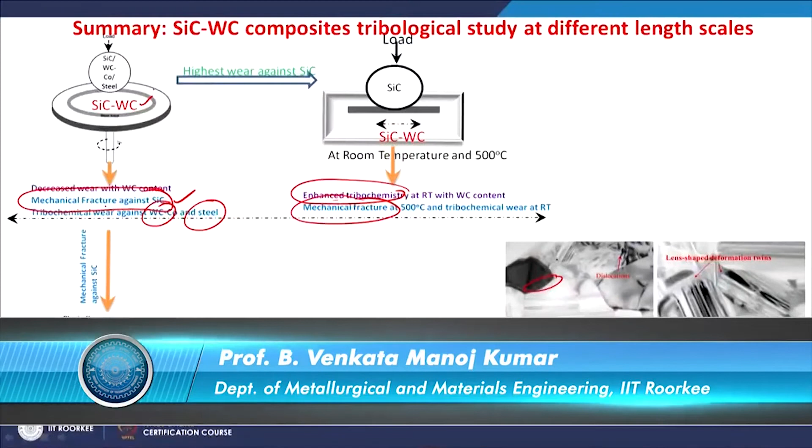So, this particular study is taken to understand the tribological behavior of these composites at different length scales, from the worn surface to underneath the worn surface. Particularly underneath the worn surface, the study was done to identify the origin of the wear.